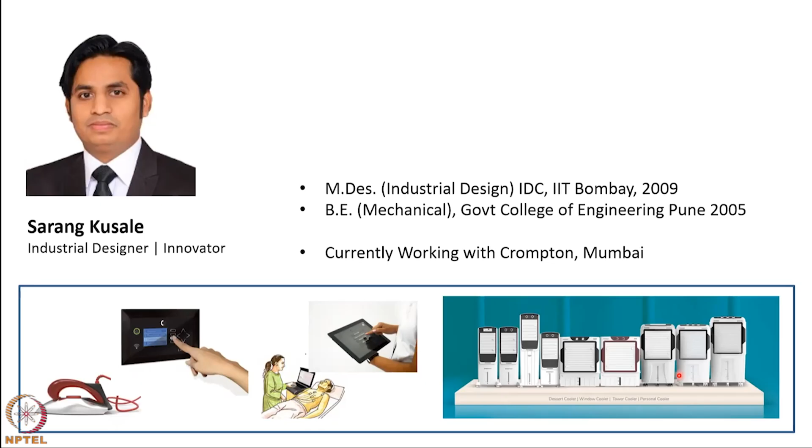Now, regarding innovation - what is innovation actually? It's very fuzzy. Anyone want to answer? Let's have a quick interactive session.

A creative way to solve a problem. Okay, anyone want to add to that? Something which is new, not yet present in the market. Absolutely, definitely - modification, an advanced version of something that is already existing. So what is that advanced version, what is existing? Like bulb to tube light, for example, or bulb to LED bulb. The bulb was an invention, and the next thing that goes beyond that makes it usable and very much accessible - that makes it an innovation.

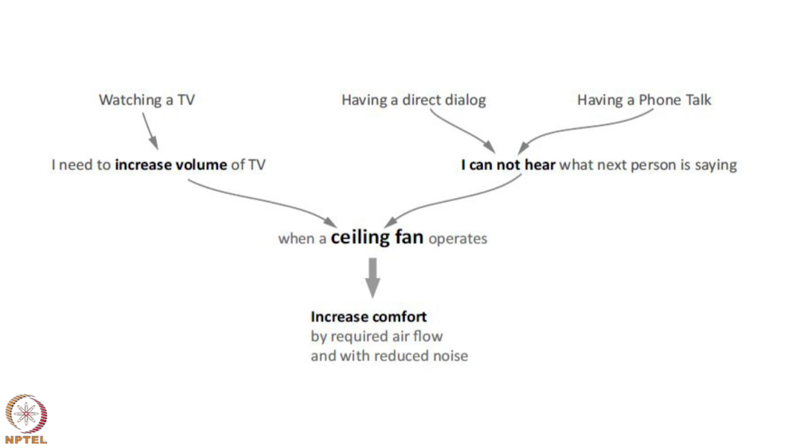It looks very simplified here, but it takes a lot of time to arrive at this - a lot of actual user research was involved. Then, going ahead with this insight in mind, I was on a ferry ride and I encountered a seagull bird. I was photographing it, and that really caught my attention, because that bird doesn't flap its wings often. There's a very interesting thing about seagulls - it's the only bird you spot out in the ocean, because they use the wind current and don't flap their wings very often. That's why they can conserve energy and glide for hours and hours over the ocean.

So after I came back to my desk, I searched technical papers and actually got hold of some real wing profiles, and then took it ahead. So this is how the project started.

This start wasn't like a normal project which starts with a marketing brief, but it's kind of the hobby project we do. Once those projects reach a certain level, the proof of concept level, we showcase them to marketing. Then we discussed the seagull bird concept and did a technical study about the wing profiles.

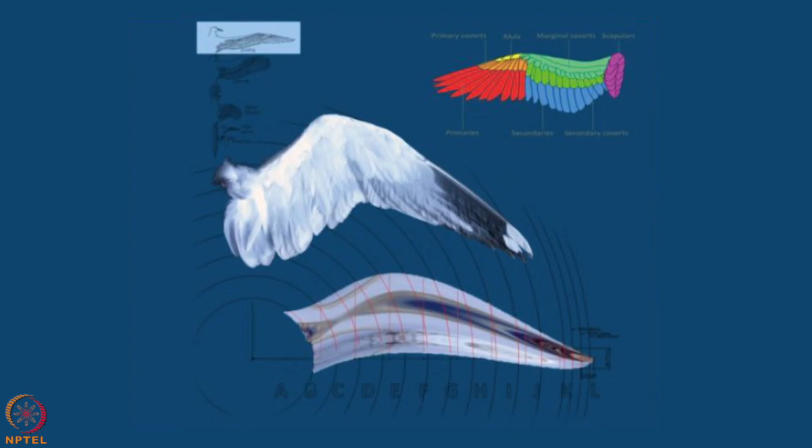Then a lot of iterations I did with the digital model, actual paper models, and actual 3D printed models. A lot of refinement was done, so every revision is an upgraded version of the earlier one.

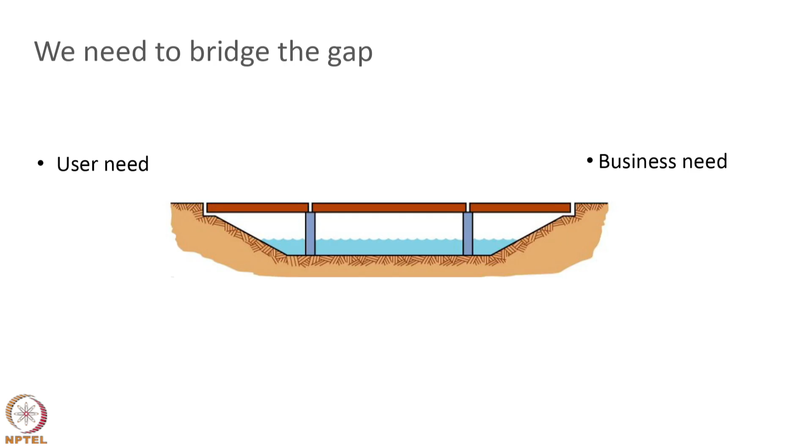While developing a concept around this seagull bird profile, when we are making a commercial project, we need to bridge this gap between business need and user need. We are well versed about the user need, because we know what's faced by the user and what ideas we get, but that has to be commercialized into a successful product. So we have to study the other side also.

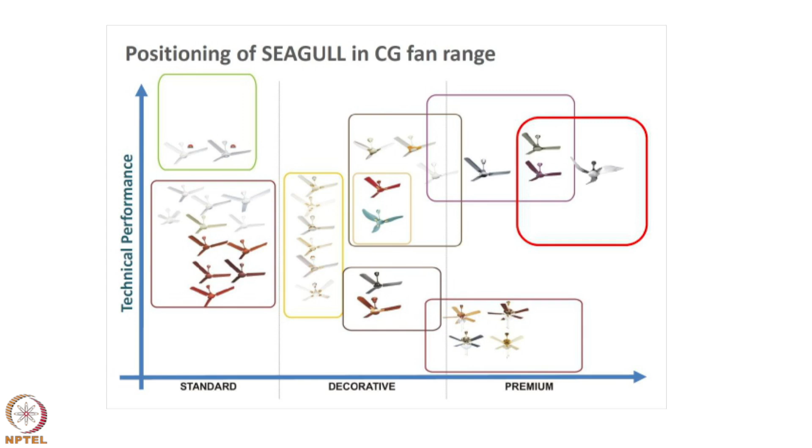So I had to struggle a lot with the marketing team, the business team, explaining that okay, having a certain amount of airflow on your skin is required, but that doesn't necessarily mean you should have that high speed of RPM. So that's an interesting angle.

There are also paradigms in people's minds, because whenever you want to change something which is not part of the existing scenario, people find it very difficult to digest.

So that's why we did the basic concept of this. These are concept renders, and we did an actual prototype of the fan in 1:1 scale, with this kind of detailing, so the 1:1 scale gives them the exact idea of how the fan will look.

There was also a question whether this fan would provide sufficient air. So for that we made a 1:1 actual prototype mounted with a motor, rotated it, and delivered that airflow feeling to the business people so they could make better decisions.

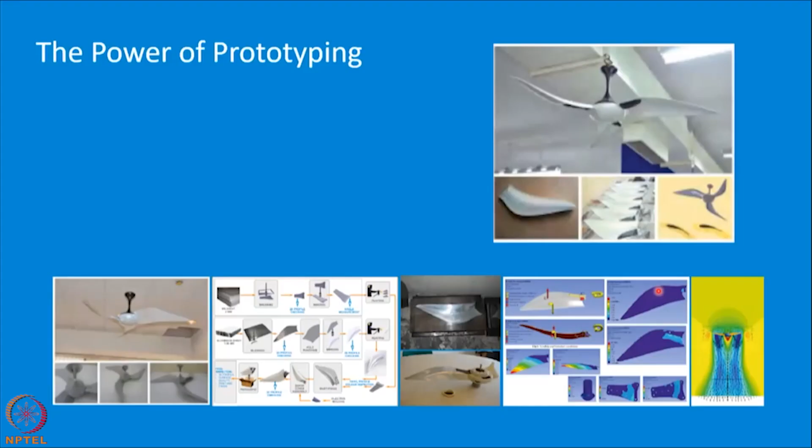That's where the power of prototyping lies. Whenever you're working with Chakku sir, he always insists on having prototypes and mock-up models, and he won't be satisfied with just one mock-up. Building more prototypes helps, but when demonstrating a concept that's out of the box, a prototype is a very powerful tool that can provide the product experience for the target audience and the business people as well.

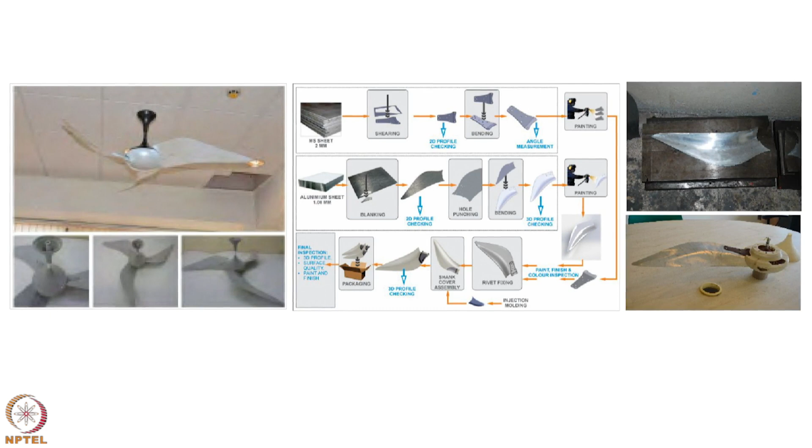So we made this actual prototype, built a raw tool of this blade, and also did simulations to understand the airflow and whether it would deliver the same amount of air.

This way we were successful in providing the same amount of air but at very low speed. The existing fan runs at 400 plus RPM, but this fan runs at only 280 RPM, with considerable savings in decibels, that is noise levels. So this is the blade profile we developed, and later on we also filed a patent on this.

So this blade has a profile which is continuously varying from hub to tip, and from the leading edge to the trailing edge. So it's a continuously varying profile. A patent is also granted on this blade profile. If you consider the form, it's very functional, and the functionality of this form helped us get this patent.

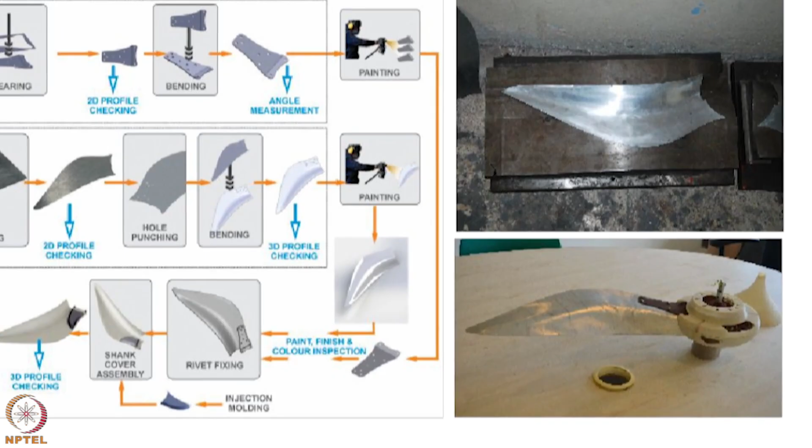Initially, before doing the injection molded plastic blades, we actually made a raw tooling and an aluminum blade with this cut. This was the actual raw tooling we made — a tool made only for prototyping where we made this blade. Then with this fan we did the testing, which gave us both the result and the confidence.

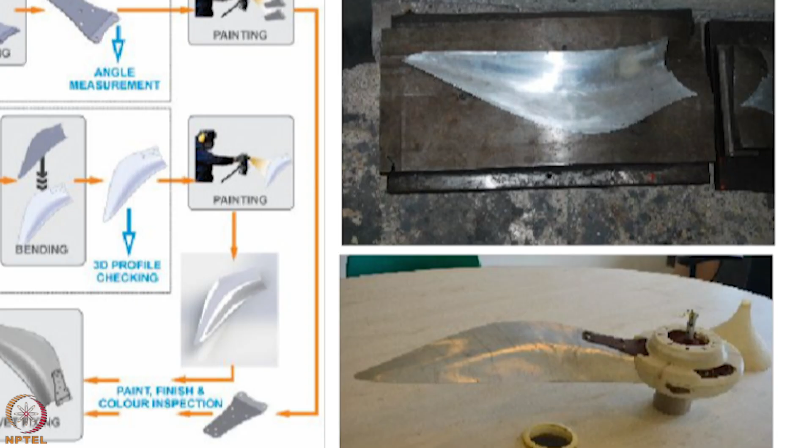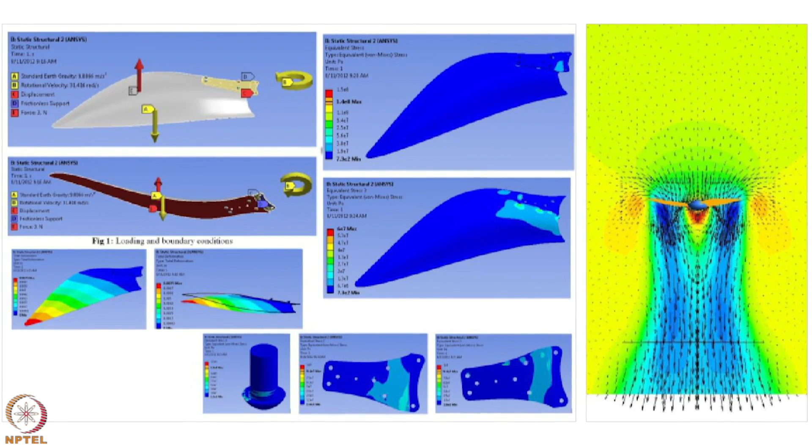We also took help from our simulation experts, where we analyzed the flow of this fan. This is how we do the air delivery testing, and we did a similar setup in simulation, along with a lot of stress test analysis. The point touched upon is very interesting: the normal blade has a shank with a double twist bend in it, but this design doesn't have that bend. It's designed so it has only a single bend, so the blades are at an angle. But because the blade itself has a continuous curvature profile, it doesn't need the other angle. So this is simplified.

Also, during the structural analysis and airflow simulations, it came out that this is a much stronger and more effective blade. I also like the point that when it is molded, because of the curve, it becomes well suited as a molded blade — it's also designed for molding. The flat blade would be very flexible, but a blade like this would be really strong and nice even when molded.

When we were doing the earlier user research, we found that when you buy a ceiling fan and clean it for the first time, you change the profile of the blade, because sometimes the blade is not accessible. So people try to pull the blade, which destroys all the set angles in the blades, and then it starts rotating or vibrating. And even this blade — I have this ceiling fan mounted in my house — I took it out and washed it.

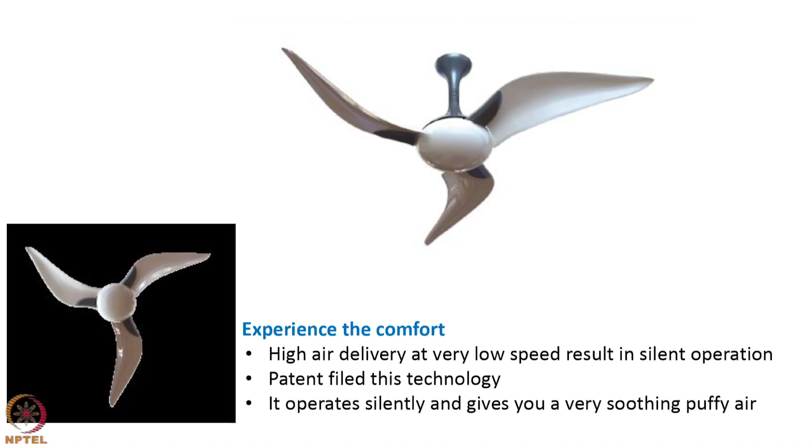Basically, companies work on efficiency and low risk activity, so the whole ethos of a company runs on that level. So what happens when you come with something disruptive like this? This is like a disruptive fan. Nothing has happened to fans for ages other than a bit of technology now, from AC to BLDC, which is a great disruption on a technology level. But formal disruption - I call this a formal disruption in the fan segment - never happened like it did for my Z-line petrol pump. That type of disruption is very, very difficult to bring within an organized company. So I'm very proud of what Sarang has done.